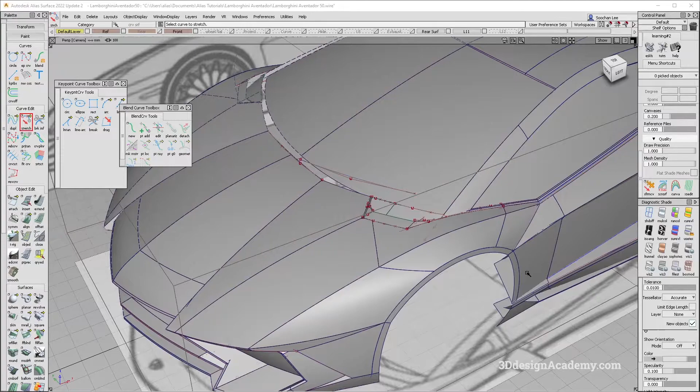In the previous lesson, we spent some time working on this detail. The only issue is that with the current setup, I think this was a little bit too flat. So I tried to find a reference, and luckily I found just the thing that I needed to build this area. As you can see, this surface is actually pointing down, so it creates a little bit of a rectangular shape with a point in the end. I think that's going to help us build a little bit of thickness for this surface.

Before I continue, I'm going to make this quite a bit thicker. As you can see, it's got a substantial amount of width, and I think what I made is a little bit too thin. So I'm going to start with that first.

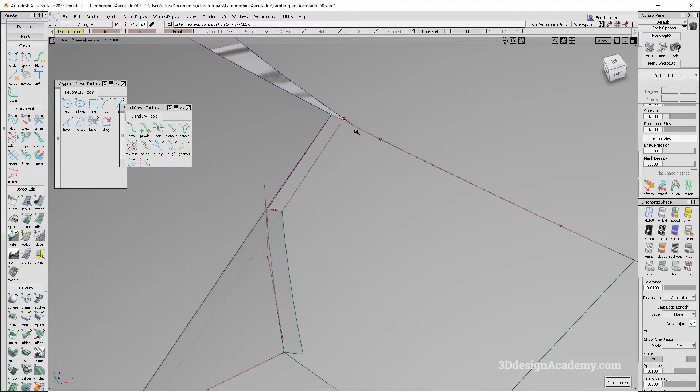I'm going to delete this one, and delete this surface as well. I'm just going to create a curve along this edge like this, and use the stretch tool to point it down a little bit.

Let's go ahead and do a rail, so it's just going to be one and one. I'm going to be using the edge like this, and just see if this is the appropriate thickness.

I think it's a little bit too thick, so let's find the extend tool. I'm going to extend it back until the thickness is similar to the image.

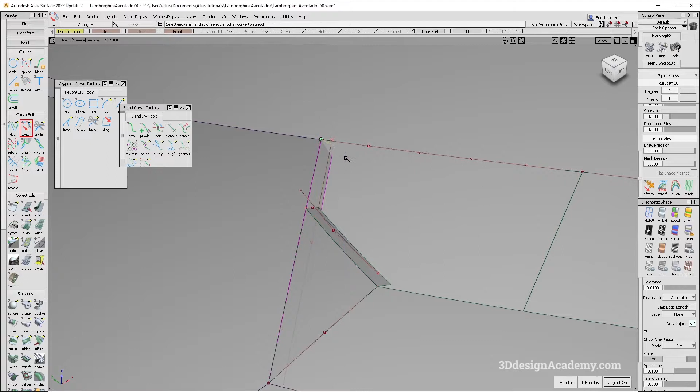I think this is probably close, but the angle could be adjusted a little bit. So I'm going to grab the stretch tool like this, shade it back up, and lower it like that.

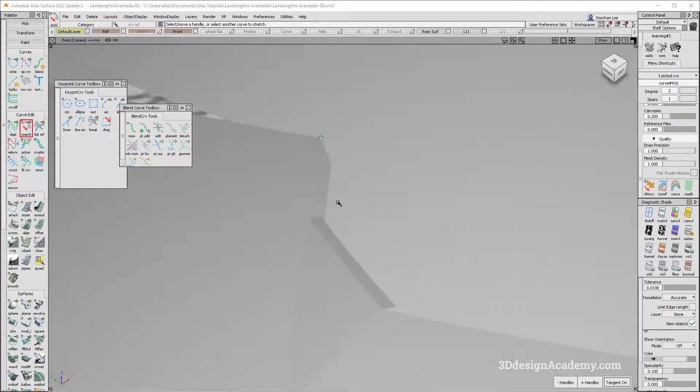I think that looks good. Maybe I'll move it up a little bit. I think that's pretty good, so the width is good. Yeah, the width is definitely an improvement from before.

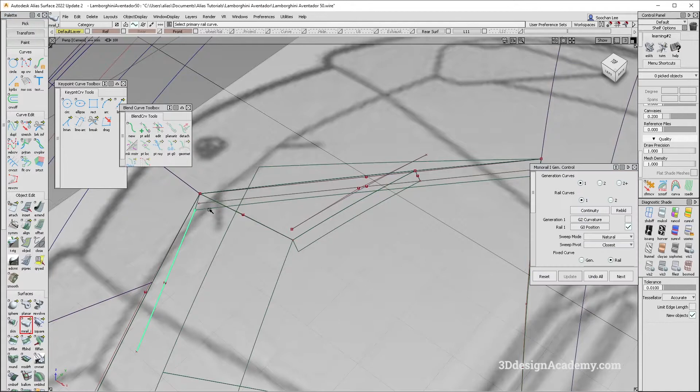Now let's go ahead and create some thickness here. Actually, before I do that, I need to close this area off. So I'm going to grab this curve, snap it here. The angle should be the same, and I'm going to create a rail like this, maybe set to parallel, which will cover this surface.

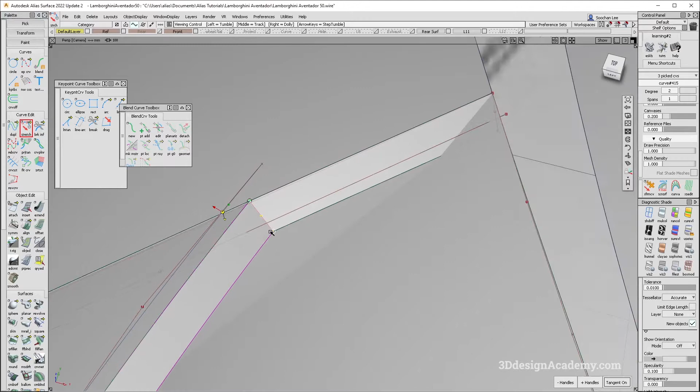Now let's go ahead and build the thickness for this part here, which in this case is carbon fiber. Let's grab this curve and snap it over here. That gives a little bit better angle for this thickness.

So let's go all the way around the model. I'm going to grab a curve like this, and this one is also going to be a rail - actually natural, I'll do natural for this one as well. Next position failed, so I'm going to turn explicit control off, and lastly do the same thing here.

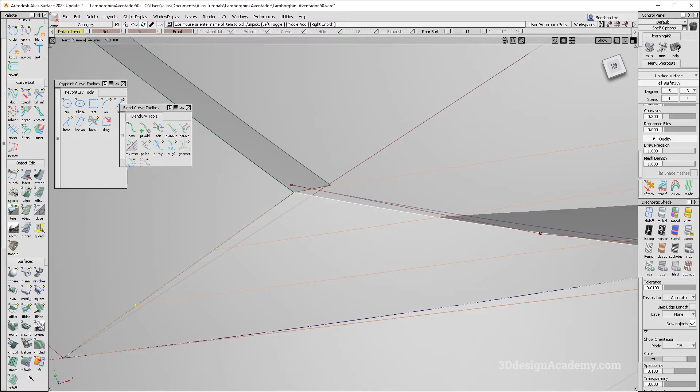That's weird, I don't know why that's not matching, but that's okay, I just need to update it. So I'm going to untrim this piece over here like this, and make sure that it is all lined up.

I'm going to say position align, and snap it over here. I wonder if this is off over here, but it's not. I wonder what happened there, but we can always fix it - that's not a huge issue.

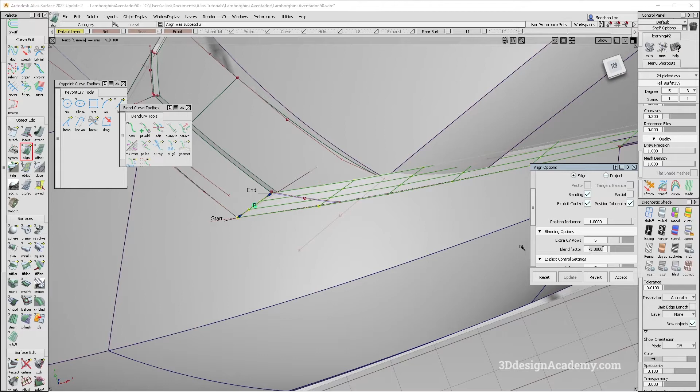I'm going to turn blending on, extra CV rows of 5, blend factor of 0. We are chopping it off here, so it doesn't need to be that precise, but let's try to get it as close as possible. Oh okay, I think that might have been why.

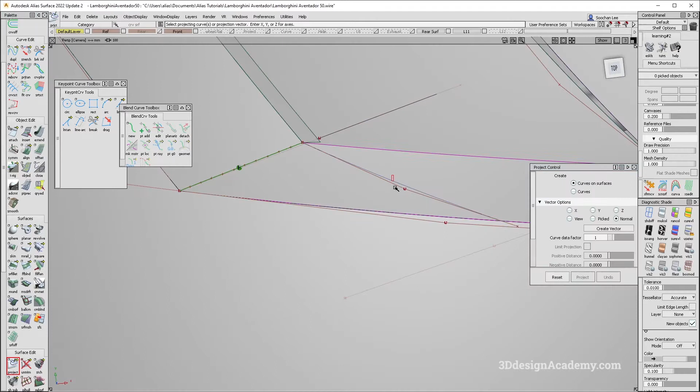So I did adjust the height of this, but I think the projection vector might have been not from the top view, but maybe from like a perspective view, so maybe that's why it was a little bit off. Okay, so I'm just going to project it from the top view like this, and I'm going to just trim that off.

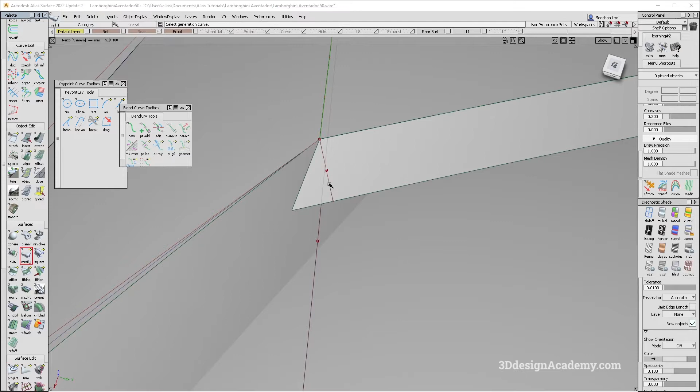Now let's go ahead and create a curve over here to close this off. So I'm just going to do something like that. And I'm going to do a rail over here like this, and let me just check to make sure that the thickness is even all the way around.

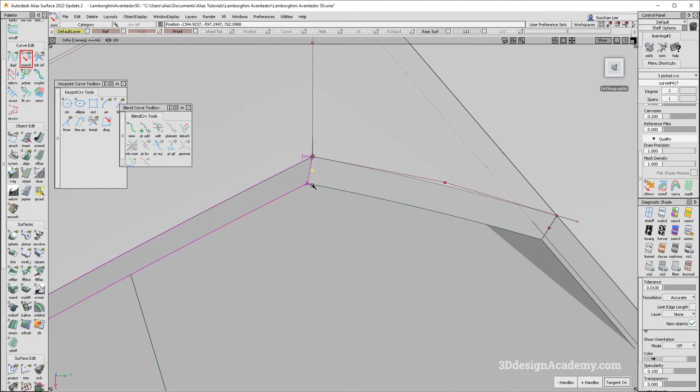Okay, so I think it's a little bit thinner over here. I think this thickness is pretty similar. This one could probably be a little bit thicker. So I'm going to just shift the CV, or shift the curve, a little bit. Okay, so I think that's a little bit closer. Maybe just a hair.

A little bit more. Okay, so I think that looks good, and I'm going to make sure that this is also a little bit thicker. So I'm going to just snap a curve over here like this, and I think that looks much better.

Okay, so if that is the case, I think the top view that we were looking at before actually matches quite well. Actually, let me see if I still have one up. No, I don't. Let me just grab it.

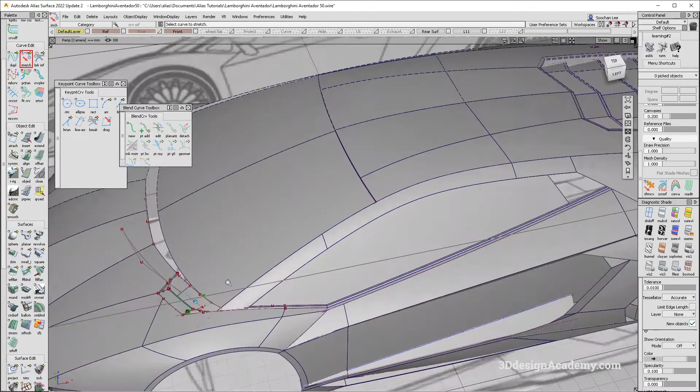So if you look at this image over here, you'll see that it actually appears quite thick. I think this is how it was supposed to be, so I think it was just my mistake of thinking that it wasn't. But now we got a little more substance here. I think that looks much better.

Okay, however, this one I am just going to end it sharp. So I'm just going to extend it, and I'm just going to chop it off like this, because if you look at this image over here, it actually ends sharp. So I'm just going to leave it like that.

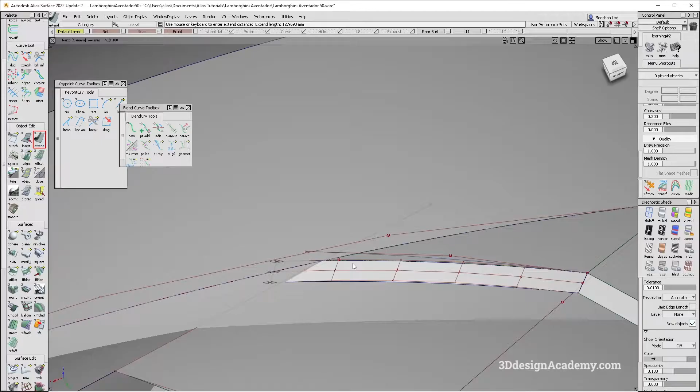When I'm doing all these gaps and flanges, that is probably the time when I'm going to update this one, but for now I think this is good. Okay, so I would say that pretty much completes the front detail over here.

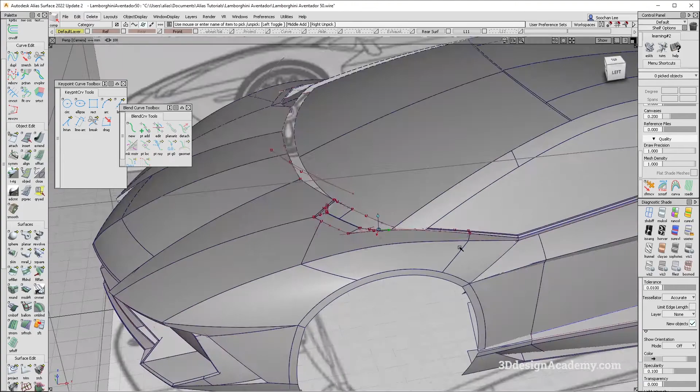I don't think I really need to trim anything. Just going to leave that for a little bit later. However, I am going to delete the construction history over here like this, and I think we are ready to move on.

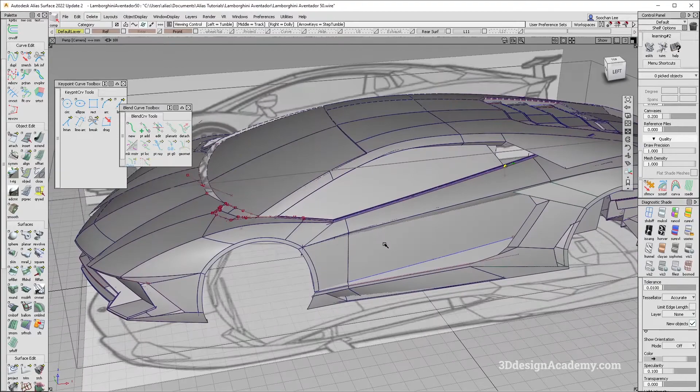Okay, so we do still need to put some design fillets here and there, but before I do that, I think I want to add a little bit more detail on the side. That is probably the only area that's not been worked on. I think the rest of it is pretty much blocked in. Now it's just a matter of adding details and putting fillets. So let's go ahead and work on this one.

Now, before I do, however, actually let's grab some images. Okay, so before I do, I think I want to lay out some curves for some of the details, like the intake over here. So let's do that first.

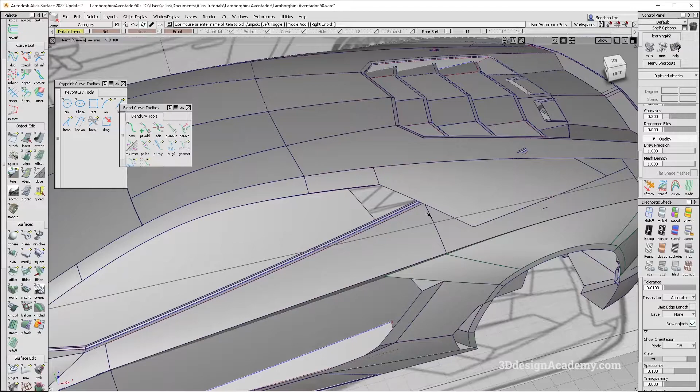So what I'm going to do is, well, actually this doesn't really look parallel, so I think it's okay. So let's grab a curve. I'm going to just project a few lines. I'm going to use the stretch tool.

And let me just see if I have any curves for any of these. I don't think I do. Okay, all right, so just going to lay this out here, and this one I'm going to say keep it here like this. I'm just going to snap a curve from here to here, and I think that's good.

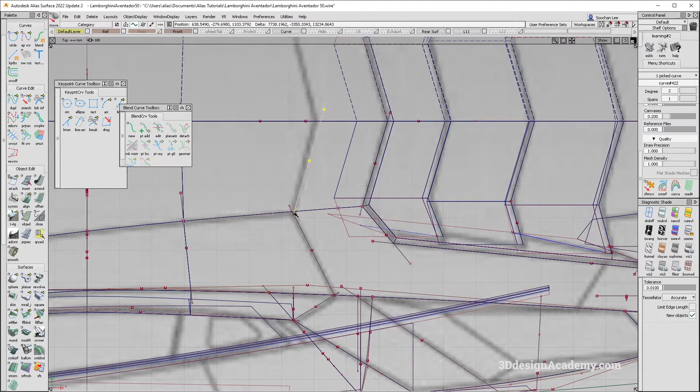And this one, I probably do want to just copy and paste this one to make it nice and parallel. So I'm going to just snap it over here. Actually, it looks like the angle is a little bit different, so, well, I guess it doesn't really matter. It's still complementary, it's not like it's doing something totally out of the blue. So I think that's okay.

Okay, so I'm going to just bring this out over here like this. I'm going to turn all the curves off, and I'm going to project over here.

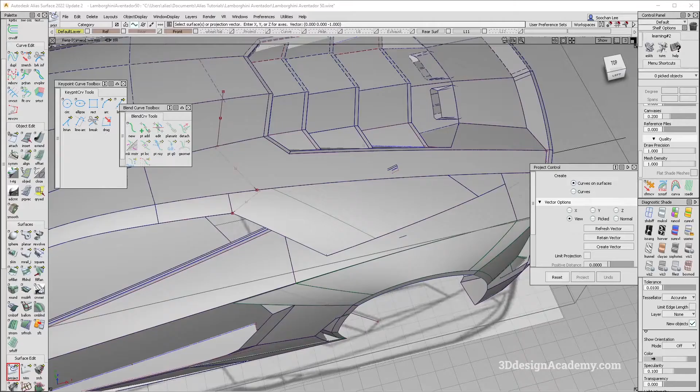Okay, let's take a look. I'll just keep this for now, and maybe start with this one and work my way forward. Let's go ahead and take a look. Actually, I don't think there's an image of the intake, so let me try to find an image that shows that a little bit better. I need a top view.

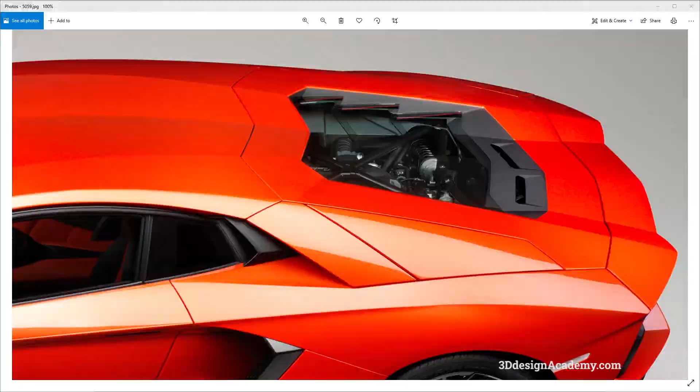This will work. So if you see this hood scoop here, in the LP700 it's just dead flat. But in the LP750, it's a permanently open scoop that rises up a little bit. So what I'm going to do is use a trim convert for this area, and now the deviation should be pretty close.

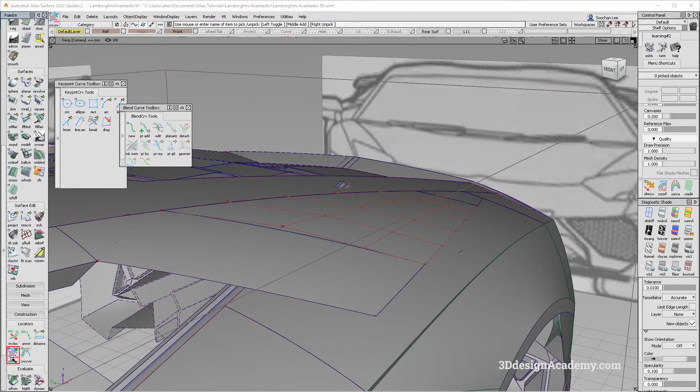Let me just check - I'm going to check the surface to surface, which measures the deviation between the two surfaces. Yes, there's a little positional continuity over here, but it doesn't need to be continuous.

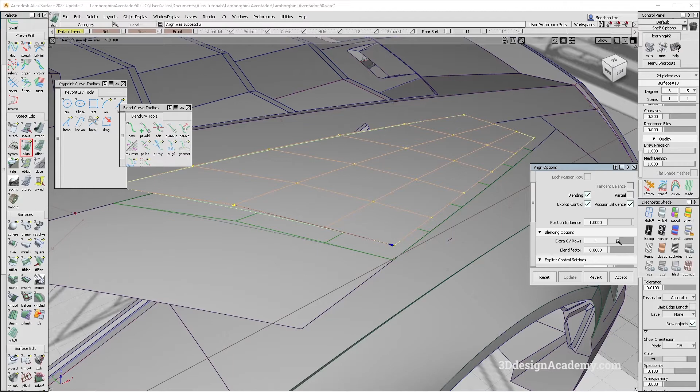So I'm just going to bring it up, and duplicate this edge over here, bringing it like this. I'm going to use align to align it to this one. For blending, I'll use extra CV rows of 4, blend factor of 1, so it's a nice gradual slope like this.

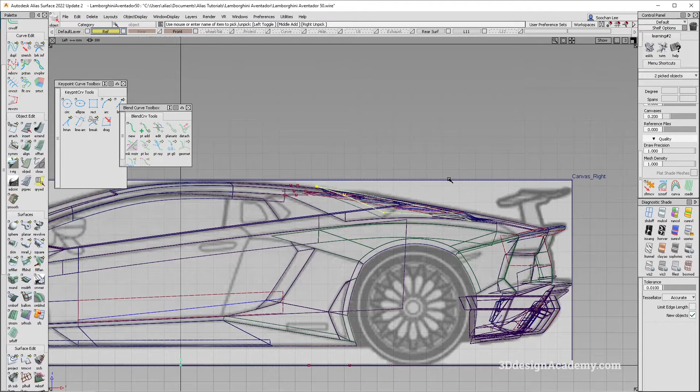Okay, and I am going to check the height. Let's hide everything except for this, and grab the side view. Before I do anything, I probably want to project a few lines.

So let's go ahead and grab this curve like this, and create a curve like that. Let's hide these surfaces for now, and I'm just going to grab a curve right here. Okay, I think that should be good.

I'm going to snap a curve here, and snap a curve here, and that's going to basically determine where we need to point all the surfaces towards. Now let's grab - actually all the curves are located in the reference layer, so I just want to isolate that.

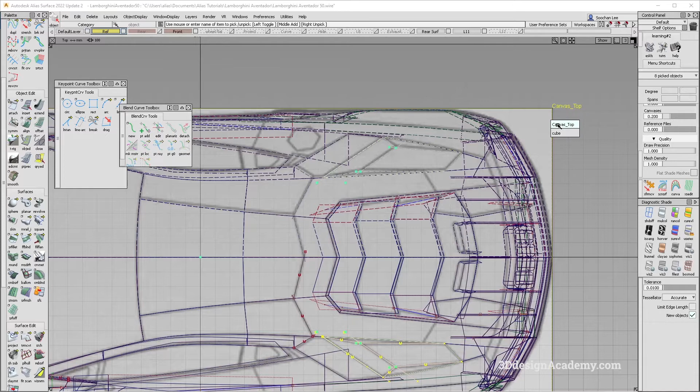I'm going to grab this one, this surface. I'm going to grab all the curves, and I do need to isolate the canvas images from here and here. Let's say hide unselected. Okay, I think that looks good.

Now let's just project it from the top to see where all the points are. I'm going to project it like this. That's going to give me some clue as to if the height is good, and I think it's actually pretty close, but it needs to go up just a little bit more. So I'm just going to move it up like this, and that's looking pretty good.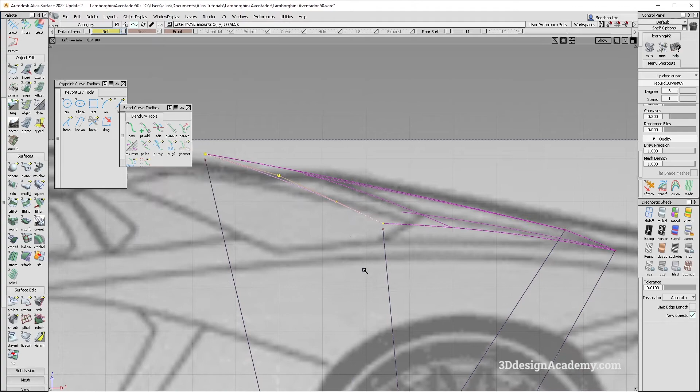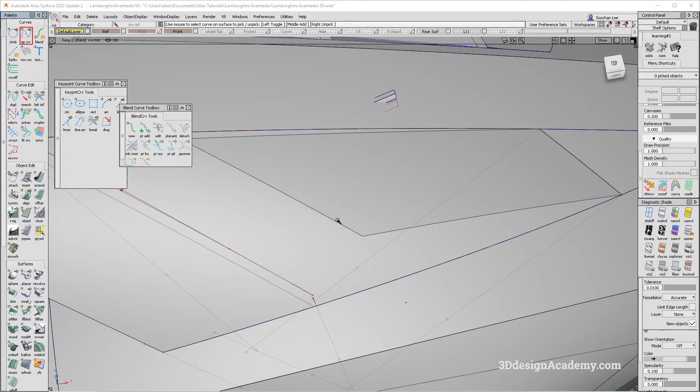Now let's go ahead and trim it off like this, but it probably needs a little bit of refinement here and there. Let me just say visible like this, and I'm going to create a curve lining up this area and this area.

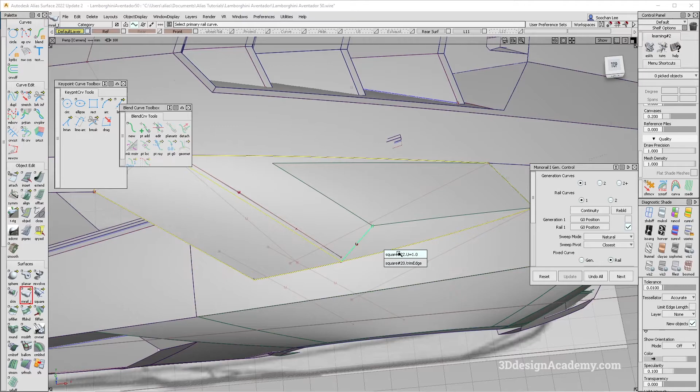And what I'm going to do is run a rail along this edge. Before I do though, I'm going to delete this one because it's actually no longer needed - all the projection curves will be needed, but this one isn't necessary. I'm just going to run a rail along this surface over here, and say curve segment on like this.

Now you'll see that it's a little bit off, so I'll have to do a little bit of adjustment here. Let's take a look, because this actually has a little bit of crown over here, but I just made it straight - I don't think that's how it's supposed to be. So let me trim it, or not trim it, intersect it, and you'll see that there's a little bit of crown.

Actually, that does look pretty straight. I'm going to see if I can grab a top view, but I don't think I have one for the LP 750. Oh, this is a bit of a dilemma. Let's see if I have one on this one. No, I don't. Okay, now that looks pretty straight, which means I probably have to lean the surface quite a bit.

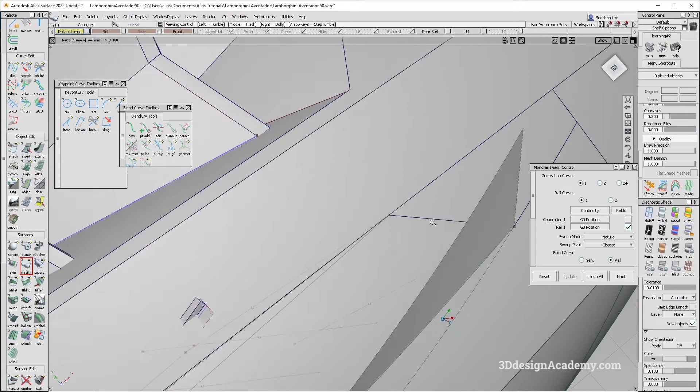The only problem is I don't know if I really want to do that. Okay, so that was a little bit too much. Let's go back to 0. Okay, so maybe I'll do maybe like -10. Okay, so that does make it a lot more straighter. The only issue is that is going to twist the surface quite a bit.

So I think what I want to do is also add a little bit of crown this way. So that, well, actually I think that's going to negate some of that effort. But it definitely does need that. So let's see if this is good.

So I'm going to just trim the surface for now. I'm going to get rid of this curved surface, and I'm going to just trim this one like that. And actually, why did it not trim? There we go. Okay, so I think, well, actually, that doesn't look too bad.

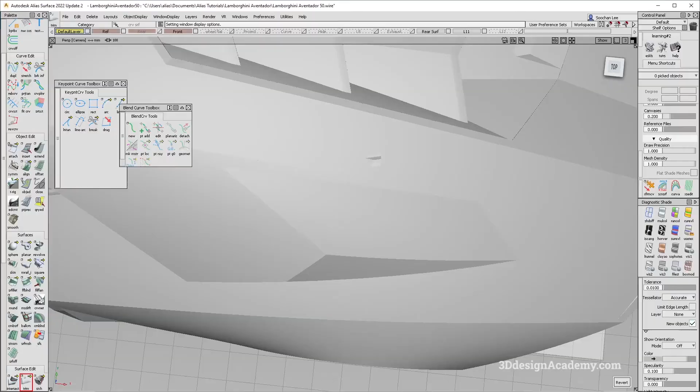I still don't like how it's curved, a little bit too curved. The only issue is that I do need a dead top view to see if this is good. But because the base curve has a little bit of curvature, having a little bit of section over here is kind of inevitable.

Fortunately, I think we are going to have a little bit easier time with this one, so let's get that in first. So again, for this one, I think I'm just going—well, because the angle is a little bit too severe, yeah, I think I'm just going to make it a little bit more straight.

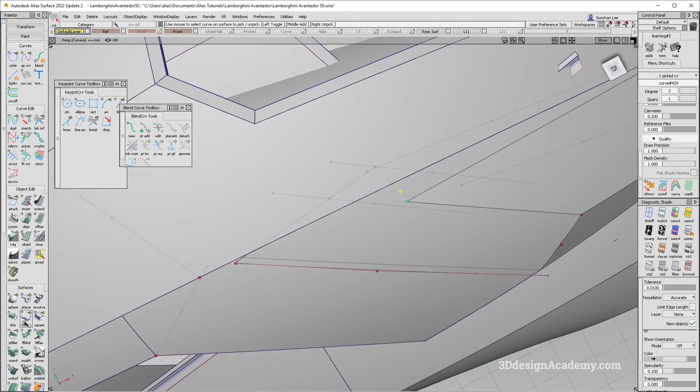I'm going to add a bit of a crown from the front view so that it's not that flat. I'm going to add a little bit of crown like this, and I'm just going to run a rail like this, and let's just run it along this edge.

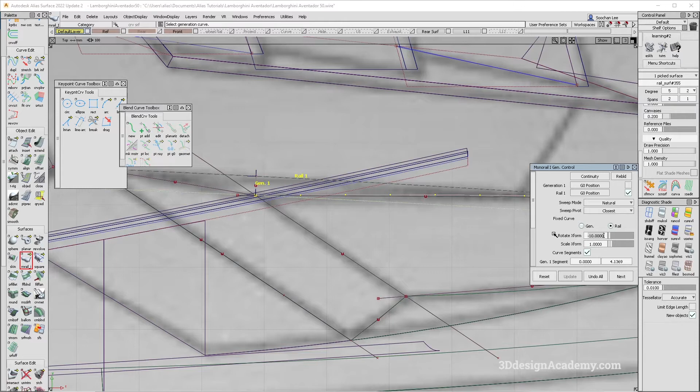Okay, so this one is a little bit better. Let's see. So if you compare the intersection point versus—it's got a little bit of crown, but it's not that bad. And actually, I'm going to delete the rotation. That actually makes it straighter. So I think this edge is good.

It's just this one that I think I need to do a little bit of work on. Okay, so I'm going to get rid of the curved surface here. This curve I don't think is necessary anymore. The only issue, well, actually, let's just trim it first.

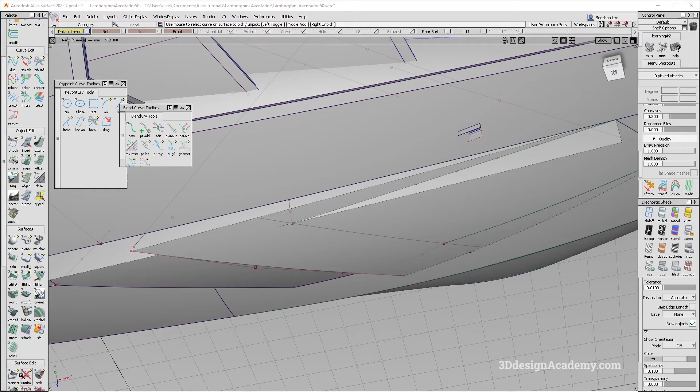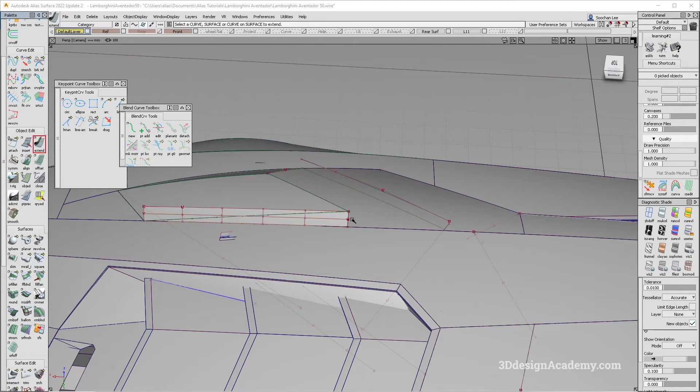Okay, so the only issue I have with this surface is that because I used a curve in the middle, a gen curve in the middle, you'll see that there's an extra span. So what I can do is just extend it back. I'm just going to grab this one, extend it back like this, and that reduced the span to 1. I'm just going to say pick nothing, and I'm just going to extend it back to this point like that, and that should be good.

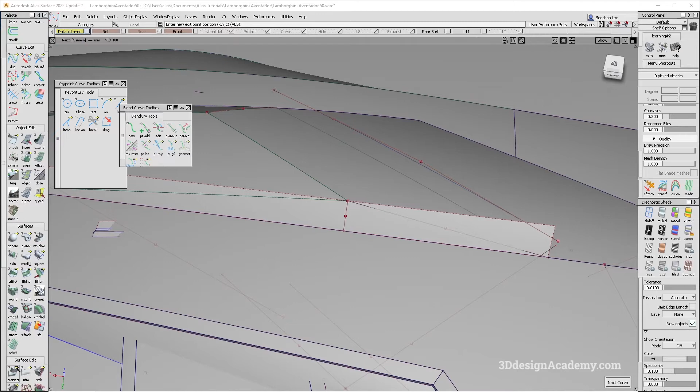So the only thing I need to do is trim this off, and we should be good to go. So I'm just going to grab a curve from here to here like that, and I'm just going to project. Now this one, I think I can just project them from view. Don't think it matters that much, and I can just trim that piece away like that. And now—

Oh, this one. Now, if worst comes to worst, I can always make it just a triangular surface, but I prefer really not to do that. One thing I can do is, well, actually no, I don't think I want to intersect it. I don't think I want to start over here and intersect it at the bottom.

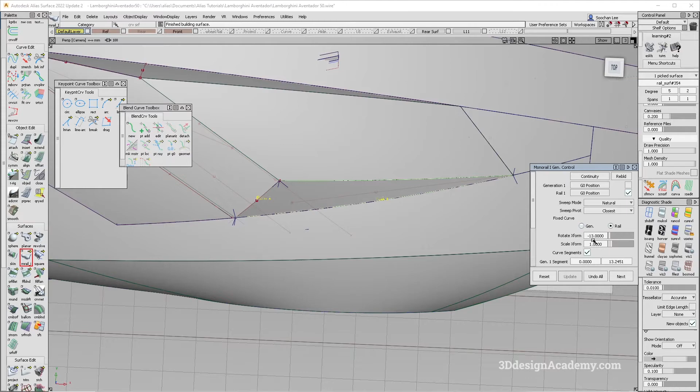So if that's okay, let me just try to rotate it a little bit more, maybe -13, maybe 15. That does make it straight. The only problem is that does give it a little bit of twist on the surface, which I don't think looks too bad. But at least I think we were able to make this a lot straighter than before. So yeah, I think this is pretty good.

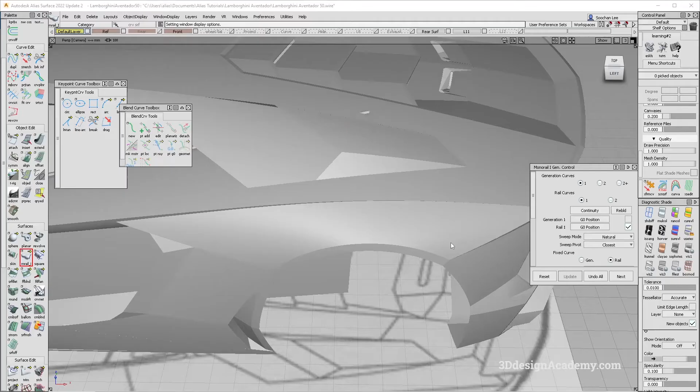So let's just compare it against the picture with the similar perspective. Yeah, I think -15 did it. All right, so this, however, does need to slope in, so let's do that too.

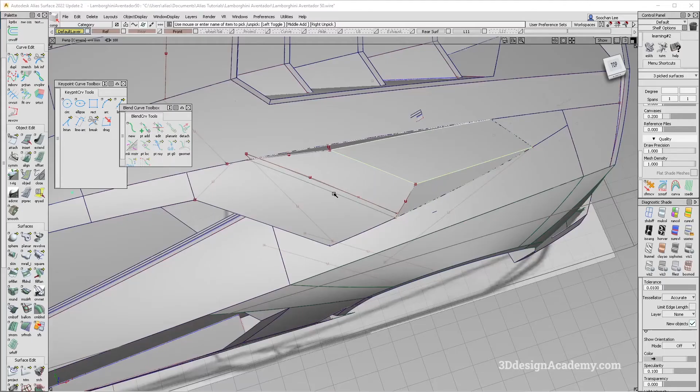So what I'm going to do is, first of all, I'm pretty happy with where things are as far as this shape goes, so I'm just going to delete the construction history on this one. And the surface does need to slope in, so let's go ahead and build that.

Now, as far as the wall goes, I don't know if this is supposed to have a separate wall. So let me see. I would assume that it's just, well, I guess that also depends on the draft angle too.

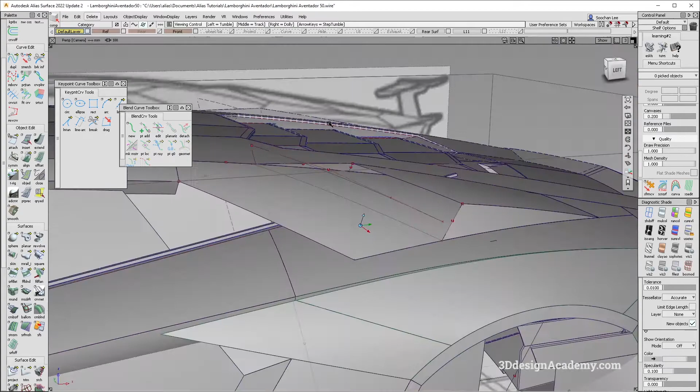So here's what I'm going to do. I don't think I need this one anymore, so let's just turn that off. Okay, so I do think that this is actually not lined positional, so I'm going to just scoop that down, and hopefully that'll be good.

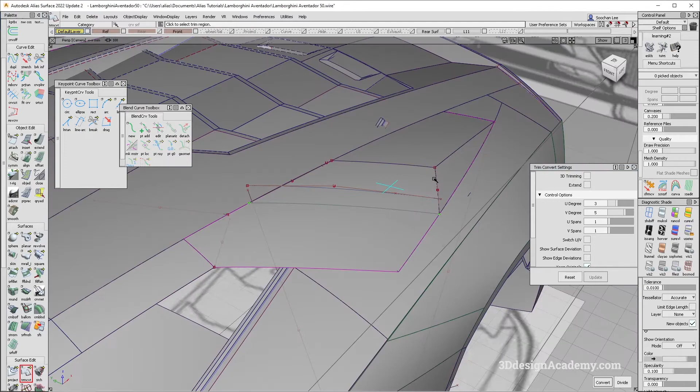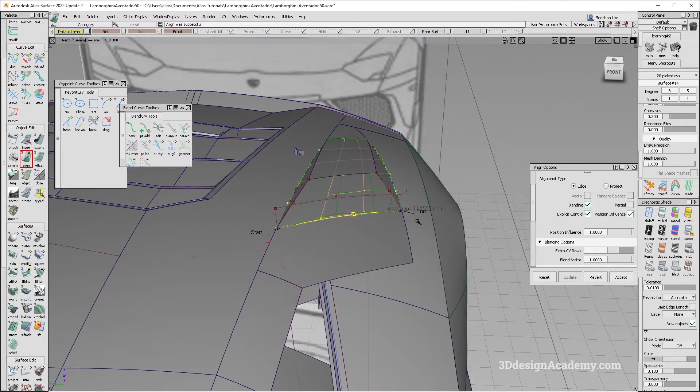In order to do that, I'm just going to do a trim convert on this surface again, but this time, because it is supposed to be touching, I'm going to align it perfectly. So let me just trim this edge like this, and I'm going to grab position align, and I'm going to say position align, G0. Okay, so that's good.

I'm going to add one more row, one more degree, so that it's actually perfectly positional. Everything's lined up correctly. I think that's good.

Okay, so now let's go ahead and point this downward a little bit. If you look at this image over here, you'll see that this is actually sloping downwards compared to this line over here, which means that the opening is getting bigger.

So let's go ahead - I'm going to just duplicate this edge over here, and I'm just going to push it down like this, and I'm going to use align to connect. Let's see.

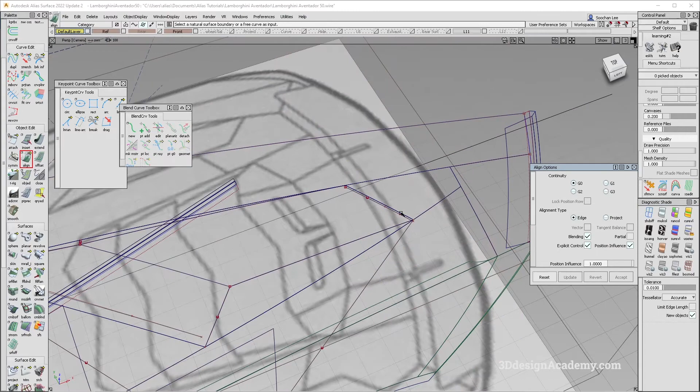Well, actually, let's turn rear off, and I'm going to just align this surface onto this curve like this. And for this one, what I'm going to do is - oh, actually, let's bring this up. Okay, so while I do think that this is a positional continuity, I do see a little bit more slope compared to the straight line we have here.

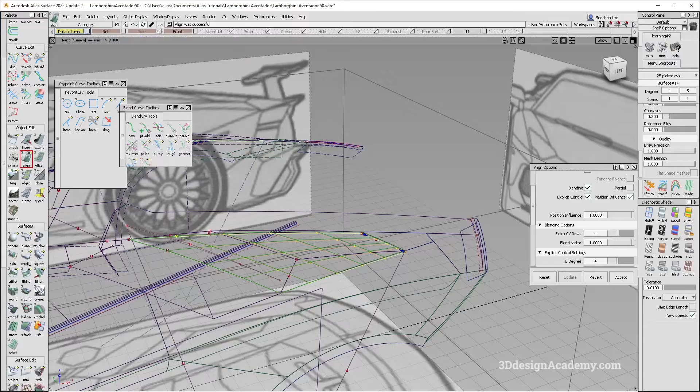So what I can do is I can just push this out. Well, first of all, push it down. Actually, let me just check.

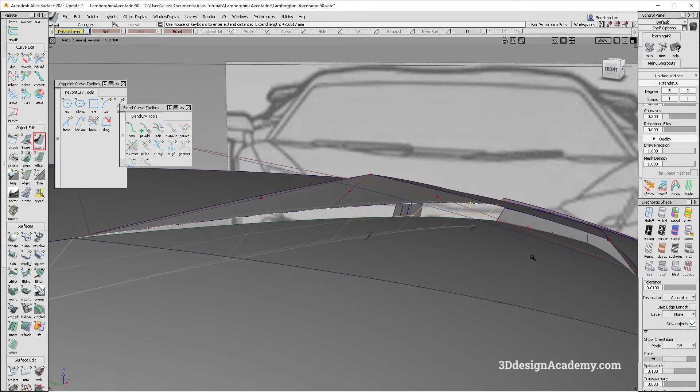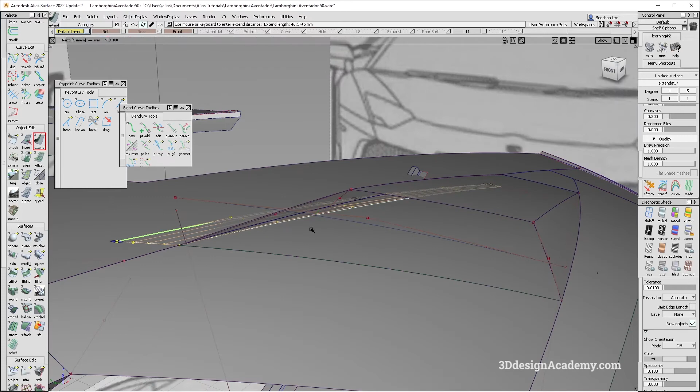Let me first of all extend this surface, because we need something on the inside. Now when I finalize all the surfaces over here, I am going to add thickness, but for now I think this is good enough, and I am going to extend this surface with merge off, so that I have some surface, so that I know how it intersects over here.

Okay, so I'm just going to grab this one, and I'm going to say degree 2 instead of degree 4. I'm going to align it right here like this. I'm going to say G2, and that's pretty good. Okay, so despite - well, let's take a look.

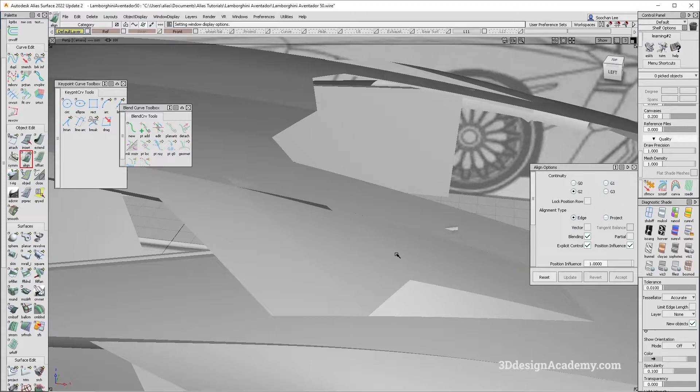Yeah, I think I'm just going to make it a little bit less of a break. So what I can do is, instead of having a blend factor of 1, I can have a blend factor of 2. So if you notice the CV location, you'll see that it's a little bit more gradual, and the amount of blending that happens with the line accelerates as it goes towards here.

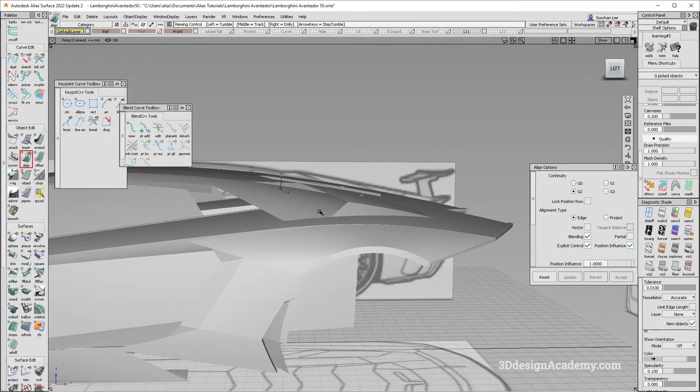So if you compare this to 1, you'll see that this is proportional. This gives a little bit less weight of movement towards this side. So I think this is going to be a little bit better. Yeah, I definitely think so.

Okay, so I might just point - well, let's take a look. Let's see, I'm going to just point it down a little bit more, like this. I think the amount of break over here is definitely appropriate for what it is. So pretty happy with that.

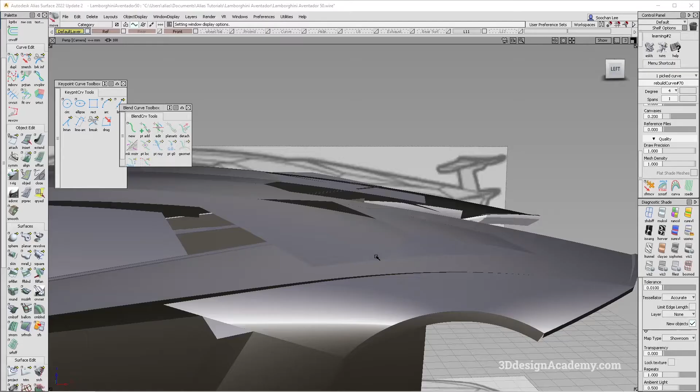Okay, so I think I'm just going to leave it like that. All right, so that looks good. Okay, so the only issue is that, well...

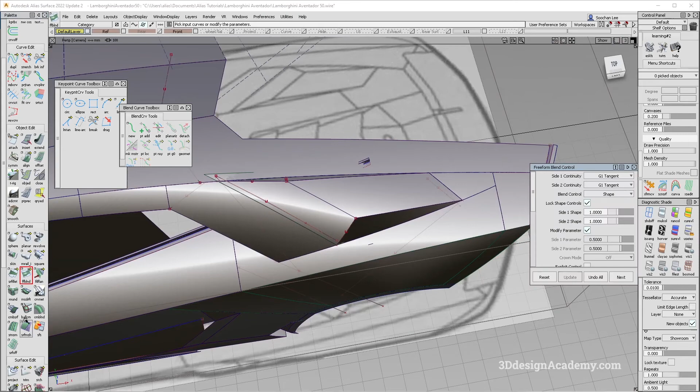I think I'm going to create a cap somewhere in the middle. So let's go ahead and draft a surface down like this so that this can act as a cap, and we can just intersect everything and have like a grill surface that blocks it in.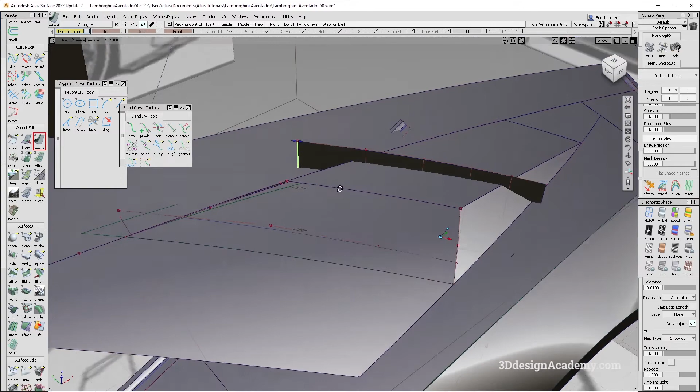Okay, so I'm just going to extend it this way. I'm going to extend it this way, and let's just trim everything. So I'm just going to grab this one, just grab all the surfaces over here.

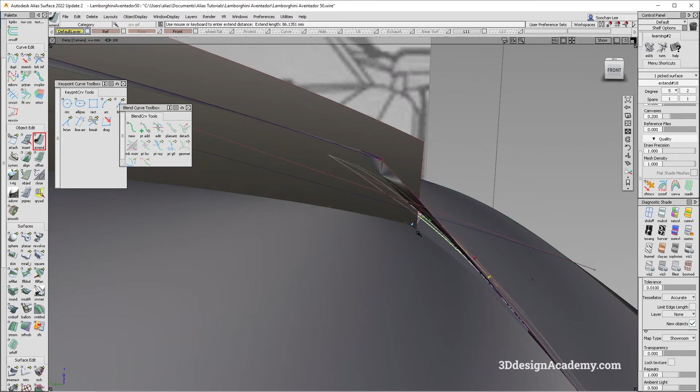Okay, so this one also needs an extension. So let's do merge off. Just extend it over here. And I'm going to extend this one over here.

Now I'm going to have to eventually close all this off, but let's just have separate pieces is okay for now. Okay, so let's do that like that.

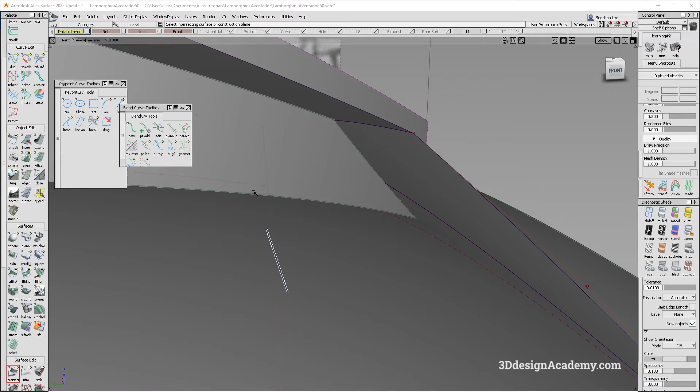And let's just intersect it over here. I'm going to say trim. I'm going to just delete the curve on surface for now. It's not critical. And we got a scoop or intake actually for the grill.

Okay, so I would need to add a little bit of thickness here, but let's leave that for later. I think I'm just going to, well, let's do this. I'm going to connect these two with a freeform blend.

It's going to be positioned on both sides. I probably want a little bit of crown. So I'm going to say, let's see. Crown is proportional. And I'm going to have a little bit of crown like this.

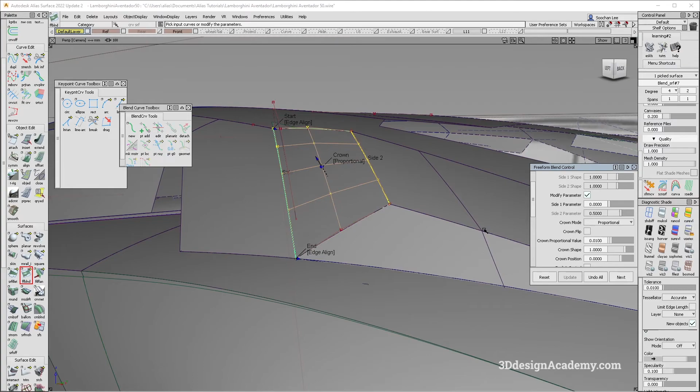And I'm just going to extend it this way. And I'm going to extend this way. And let's use these surfaces to trim.

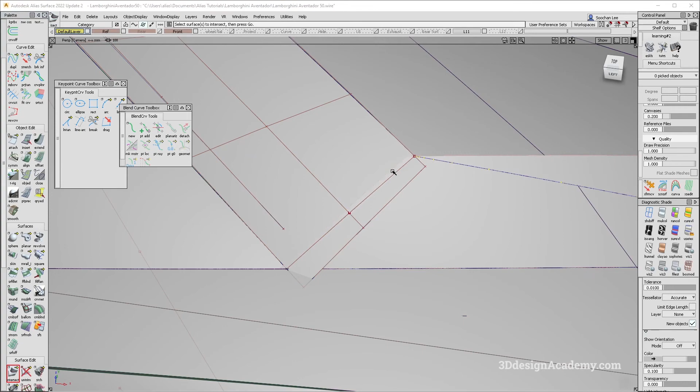So I'm going to untrim this piece over here. I'm going to extend it just a little bit. And let me just intersect this one with this one like that. And I'm going to do the same thing over here.

I'm going to untrim this over here. Now this looks way too rounded over here, so I am going to reduce the amount of crown that we have on this one. So let's go ahead and I'm going to do a proportional modification, NUV on.

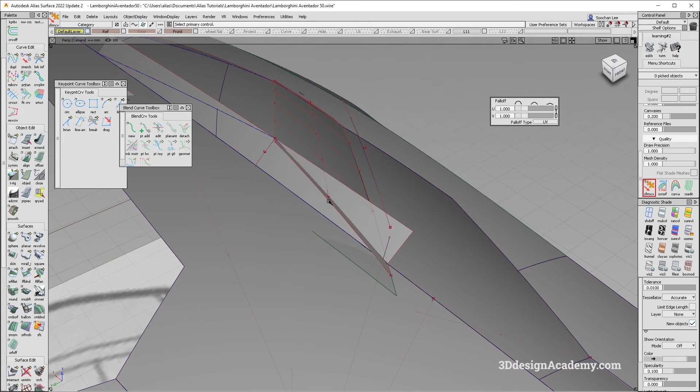And let's go ahead. Oh, I'm going to grab this edge like this, and I'm going to just push it down like this so that it's a little bit flat compared to the other side. Now, yeah, I think that looks much better.

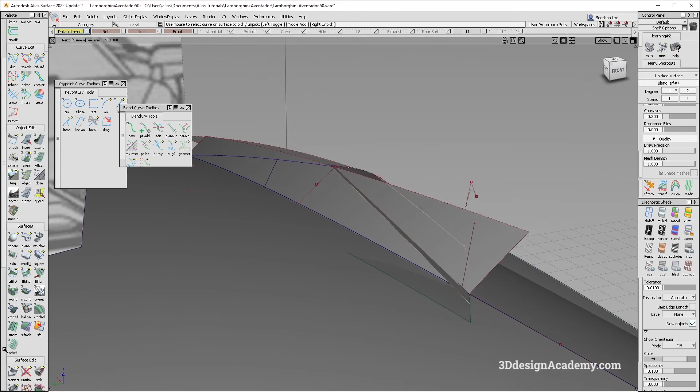Okay, so I'm just going to intersect over here, and this should be already done. Let's go ahead and trim this one and trim this one.

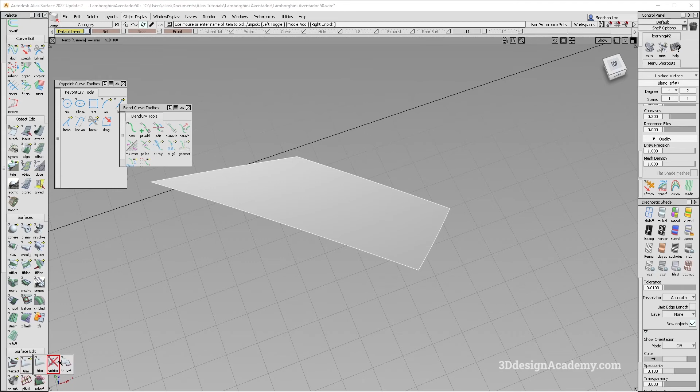Now, for the thickness, what I can do is I can just do a tubular offset. Actually, let's see if I can just do a curve offset. So I'm going to just first of all trim it, and I'm going to, let's see, I'm going to try to do a curve offset like this, and I'm going to just offset it.

Well, 5 mils might be too thick. I'm going to do maybe 3 like this. And all I have to do is just trim it off.

Whoa, that's not good. I don't know why it's all segmented. Okay, so if that's the case, I can just delete the curved surface over here, and I can just do a tubular offset, 3 mils.

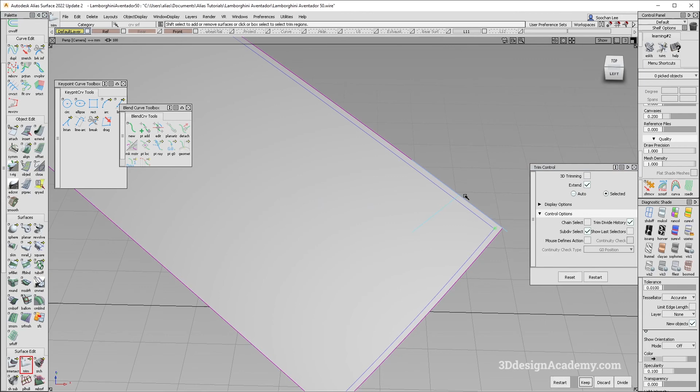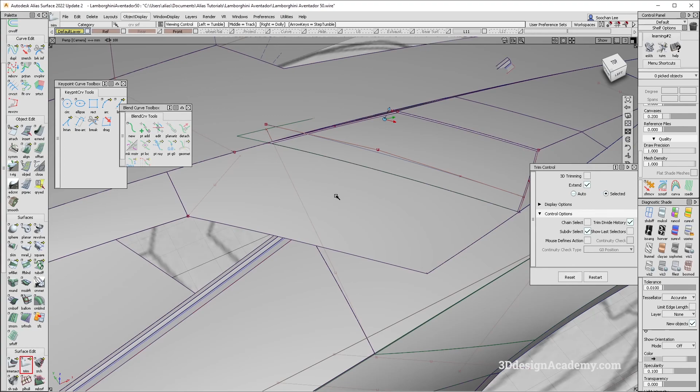That should give us the result that I want, and that is going to act as the thickness for the interior. Now we do need to add, well, because we actually added thickness, what I need to do is I should actually offset all the surfaces over here, but I'm going to leave that for a little bit later. Yeah, I think I'm going to add that for further along when we're doing even more details to the model over here.

Okay, so if that's the case, I don't think I need this anymore. So let's get rid of that. And yeah, I think that looks pretty good.

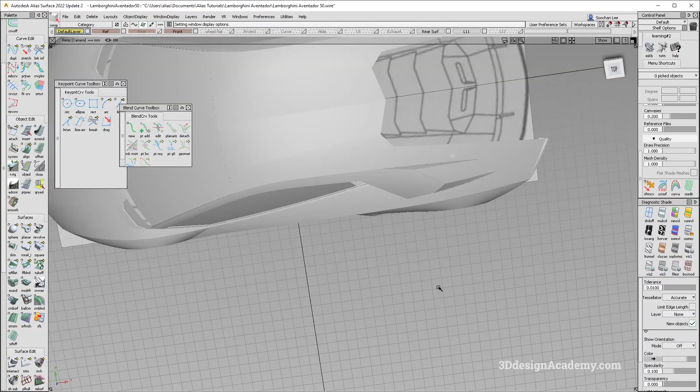Okay, so let's just bring the rear surface back. So now we got an intake for the engine. So I think we just need to fill this hole over here, and I think we are ready to add some design fillets and details over here after that.